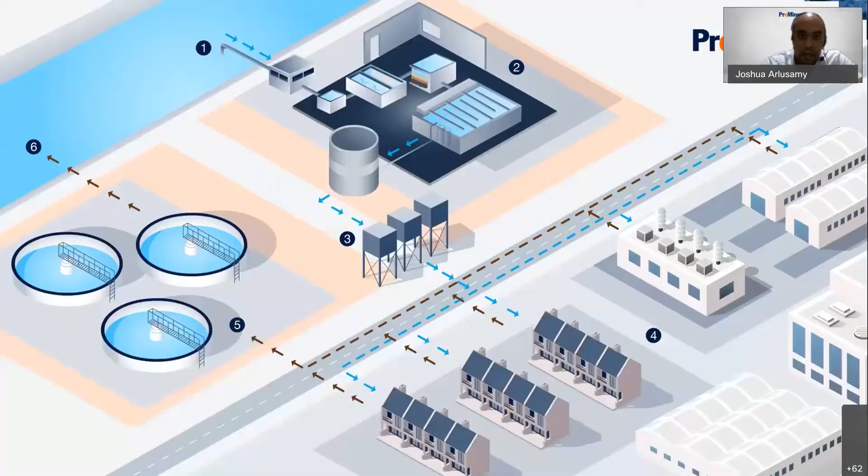While I understand among our attendees today there might be some with much more in-depth experience in wastewater treatment and process design, today we are picking up some examples and showing how technology can help to improve and also provide the possibilities and solutions required for you to use and adapt to your processes. So without further ado, let's start off with a simple overview of this water cycle.

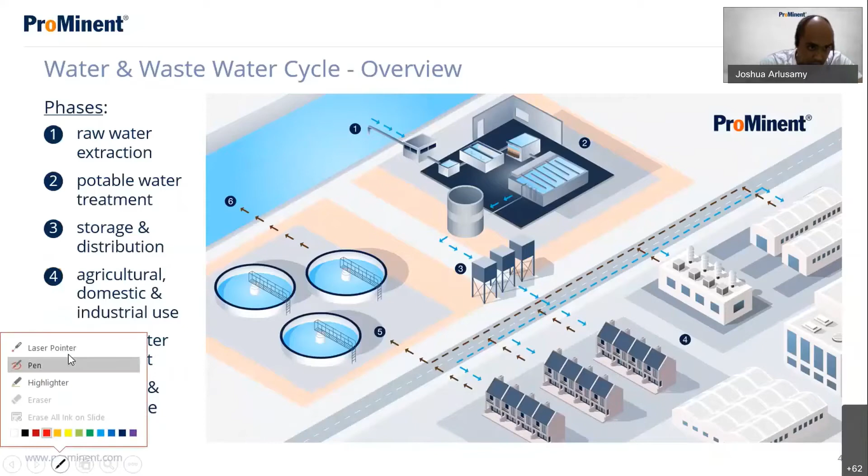Let me switch to where we have water intake by water treatment plants, which then treats the water and supplies it to households, agriculture, and also factories and industries. Now sewage from the households will be directed to our municipal sewage treatment plants, whereas factories and industries individually are required to treat their own wastewater and meet certain standards before they are discharged.

So this brings us to this next topic, wastewater treatment, called the silent emergency or crisis. Even Mr. C mentioned today, 80% of our wastewater from the homes and industries finds its way back to nature without being treated or even reused. Now, if I go back to this picture over here, yes, this is the ideal case.

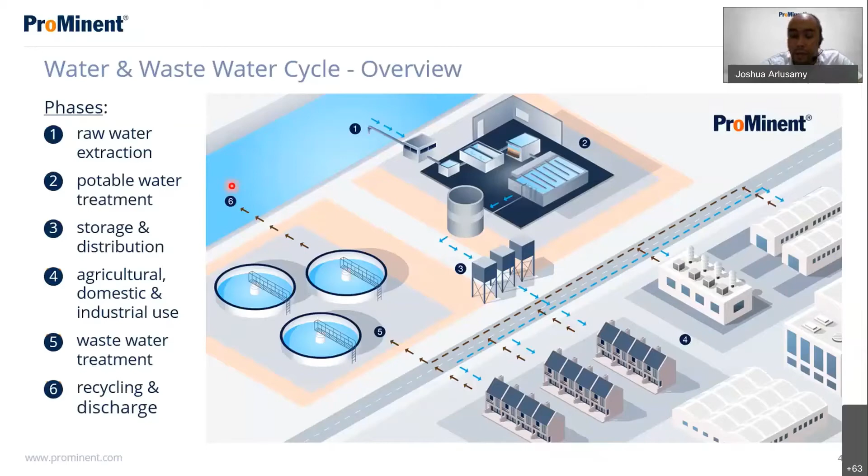This is what we want, but this is not what we see in most of our neighboring countries or even our own countries. For example, in Indonesia alone, we can see that more than 75% of the rivers monitored are highly polluted, and only half of them comply with good river quality standards.

In the Philippines, you have millions of cubic meters of untreated wastewater being dumped into the Manila Bay and Laguna Lake. I'm sure you have heard in Malaysia, we have recent water disruptions and plant shutdowns, which were then traced back to illegal discharge by factories.

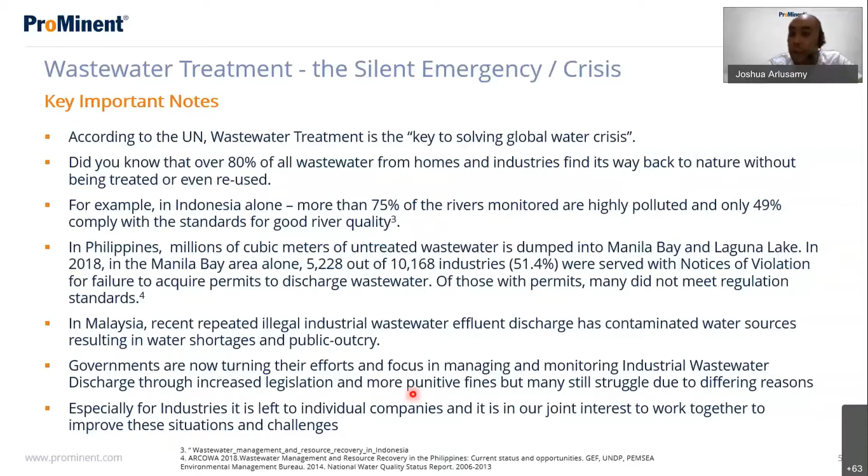So we see a lot of movement, a lot of government initiatives to increase legislation and more punitive fines, but it doesn't get anywhere because the struggle lies in the enforcement and how we are able to manage all these different industries that are scattered all over the country, some in very rural areas. So that's what we would like to address today.

Some regional insights of the countries involved. For Singapore, it is clearly stated what cannot be discharged. A pH of between 6 and 9 is fine; anything less or more cannot be discharged. Temperature cannot be hotter than 45 degrees Celsius, and caustic alkalinity cannot be more than 2000 ppm of calcium carbonate. There's a growing interest in real-time monitoring, not only to regulate, but also for us to react faster and improve efficiency and reduce wastage.

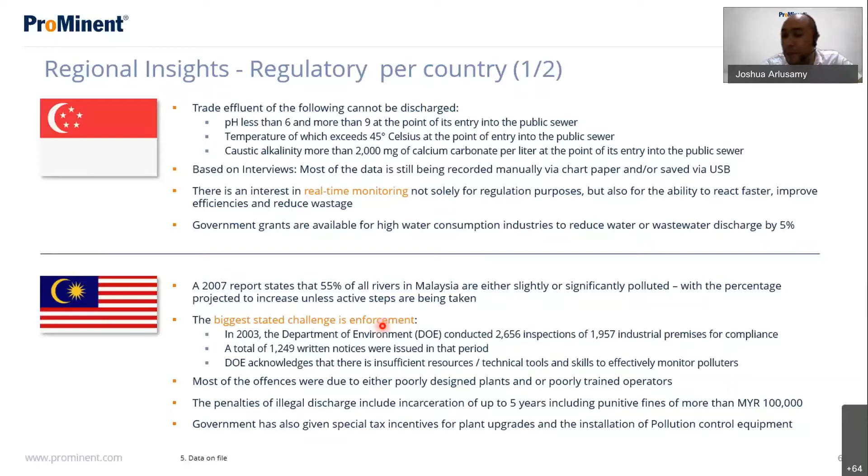In Malaysia, you will see it's a recurring theme here: the biggest challenge is enforcement. We don't necessarily have the resources and manpower to go to every single place, especially in Malaysia. Palm oil mills are a big industry for us, and palm oil mills are very much in rural areas. Even for me, at one point when I visited a treatment plant in Kelantan, you'd be surprised - upstream of the treatment plant was a palm oil mill, and I could smell the palm oil mill coming out from that factory. So those are the conditions we have nowadays.

Now, going more towards countries like the Philippines, monitoring is sort of left to individual companies for them to regulate. Places like Indonesia, again, enforcement is hard. Not only in Indonesia, we see it in Malaysia sometimes - there's discharge of illegal effluent, sometimes late at night or during rainy seasons, because you can't monitor it 24/7. You only have specific checkups once a month or once every 6 months or so.

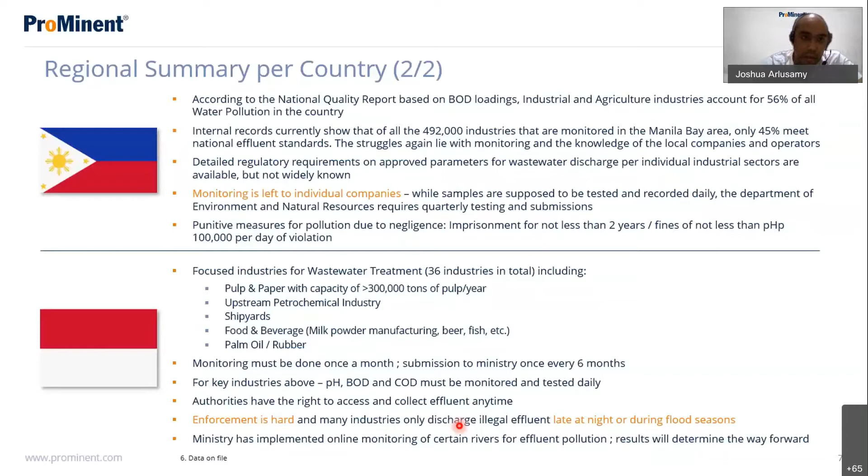This is a simple process flow of how a typical wastewater treatment looks like. There might be some changes, but what we're trying to highlight here is all these orange boxes, where ProMinent can come in as a solution partner.

We have our measurement and control devices. These are also analyzers for water parameters like pH, ORP, dissolved oxygen, chlorine, and together they communicate well with what we are actually very well known for, which is metering pumps or dosing pumps. These dosing pumps meter chemicals such as coagulant, flocculant, pH adjustment chemicals.

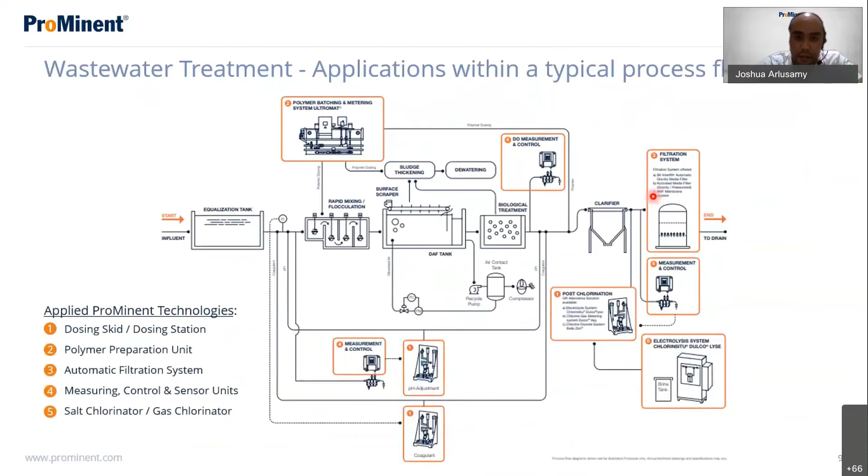So let's pick one part of the process, the dissolved oxygen monitoring in the aeration basin. We all know that aeration basin is being aerated usually by a blower, and most of the time DO is not really monitored. Most of the time the operation of the blower is manual and it's always on all the time. And energy costs for running a blower all the time is actually very high, and this is what contributes to a lot of cost consumption for factories.

Besides that, we also want to make sure that the sensors we pick are very suitable for the application we use. If you talk about wastewater, it's very dirty, high solid content. And if you put a sensor that is sensitive, we also have to make sure that the sensor is able to take this high load of solids.

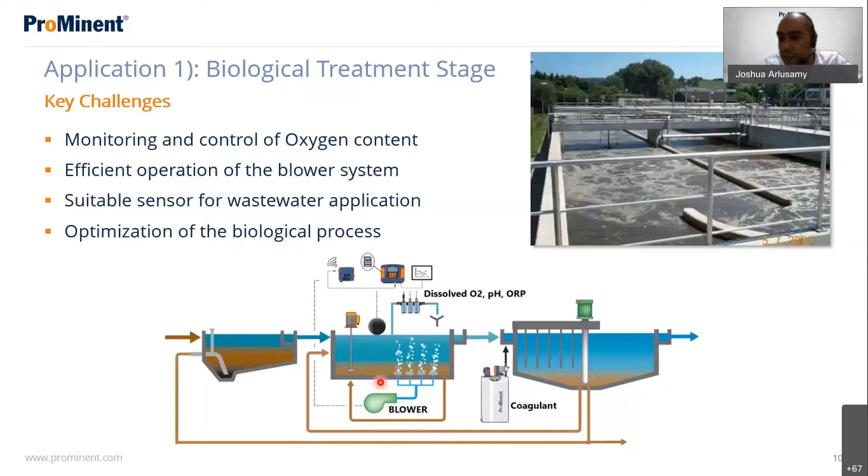And at the end of the day, it's not just the sensor alone. It's basically the controller taking the data, analyzing it, storing it in the cloud, and at the same time, controlling the blower. This whole process is what optimizes our biological process.

So for DO monitoring and control, why is it important? I mentioned about blower operation. Inefficient operation of blower system and compressed air network increases energy consumption, operational costs, and even risk of performance drop.

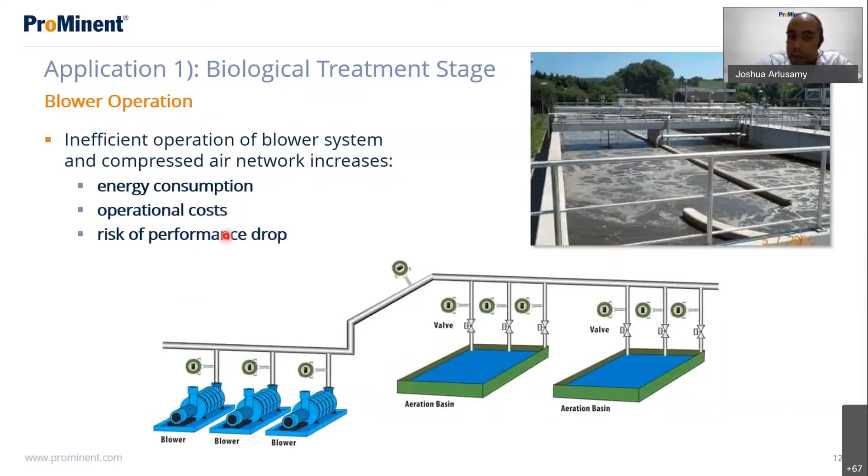More DO doesn't mean it's good. Under aeration aside, over aeration is also a serious issue for process quality. First of all, even 1 to 2 ppm above the required DO range can be wasteful. Aside, if you over aerate, you can break up the flocks that you form, creating pin flocs, which prevents them from settling, which then upsets the rest of your treatment process.

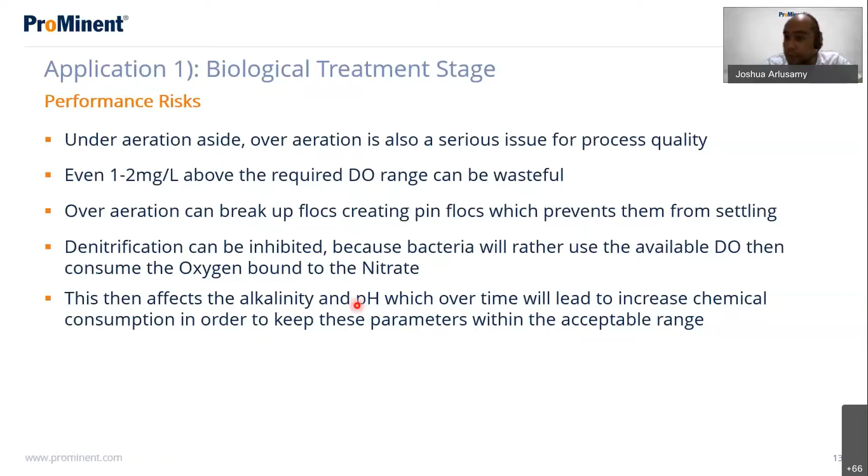Denitrification can be inhibited because when you have so much oxygen, the bacteria would rather use the provided oxygen than consume the oxygen bound to the nitrate. This will then affect the alkalinity and the pH, which over time will lead to chemical consumption in order to keep these parameters within acceptable range.

So what is our solution? DO monitoring is important because we want to monitor the parameter that we would like to control. We also want a DO sensor that is easily installed, either by submerging the DO sensor or in some cases in a bypass fitting. This controller then measures it, controls by PID, the blower for feeding atmospheric oxygen into the treatment stage.

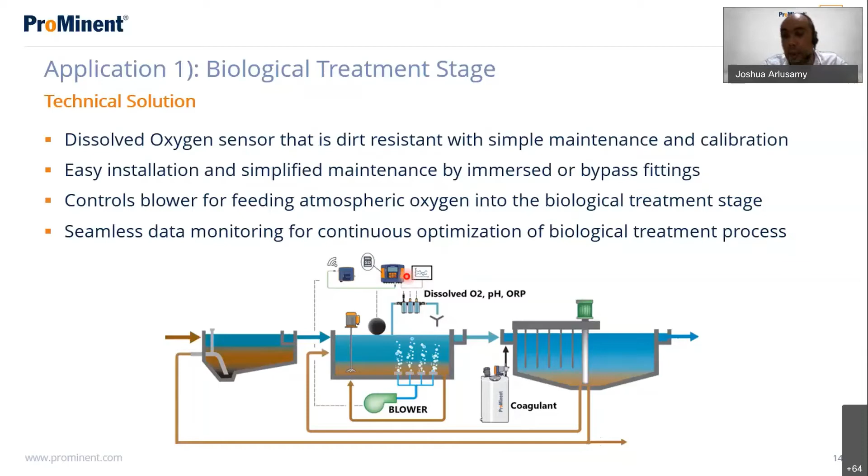And at the same time, we are continuously taking in data because DO and blower operation is not directly proportional. We need weeks of data and then we see, okay, we are still under, we're going to increase the blower slightly more. And then after collecting enough data, that's when we will know what our optimum operation parameters is.

So how do we control airflow to the basin? There are many ways to do that. This can be using variable speed drives for the blower. If you have multiple basins and a set of blowers, you can have control valves on each line to the basin to control the airflow.

Sometimes I've seen we measure airflow rather than DO, but this is not a direct correlation. So airflow alone cannot be used to control blowers. It doesn't have a direct relationship with DO. But DO itself is good because you can control the efficiency and you can set when you want to stop the blower once you've reached your set point.

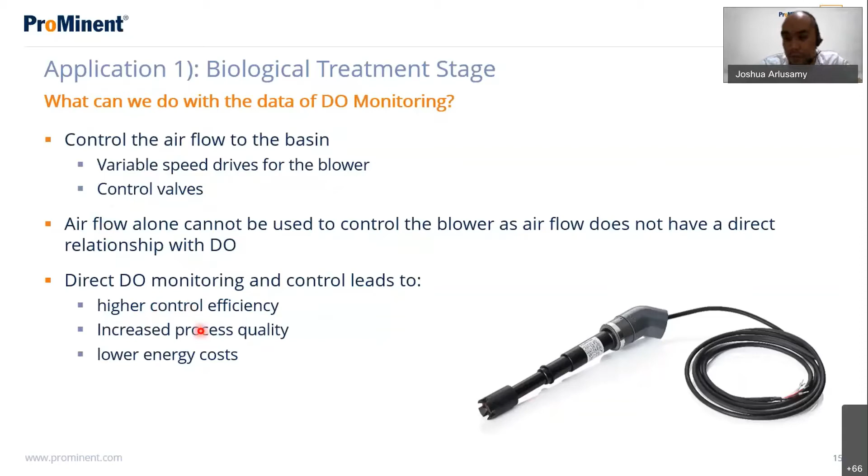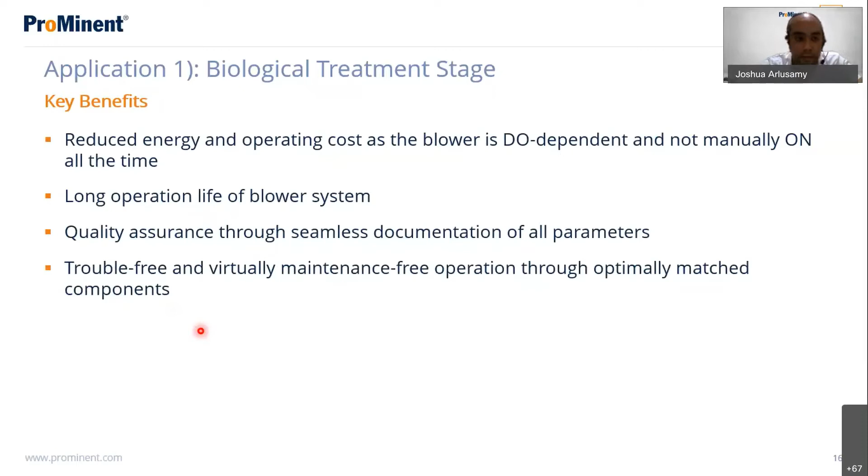Okay, so what are your key benefits? You have reduced energy because right now your blower is not always on. Once your DO is reached, it's throttling down. You have a long operation life of your blower system. You have quality assurance because you're continuously documenting your parameters, and you have virtually a trouble-free system through optimally matched components.

So implementing just a DO sensor alone is not going to solve the problem. It's always a plan, do, check, act approach. Data is what's important. When we install a DO sensor, we need to collect data for a week first to observe the trend before we adjust the control, as I mentioned before. Even power logging the blower will also help tell us how much cost savings we have on energy.

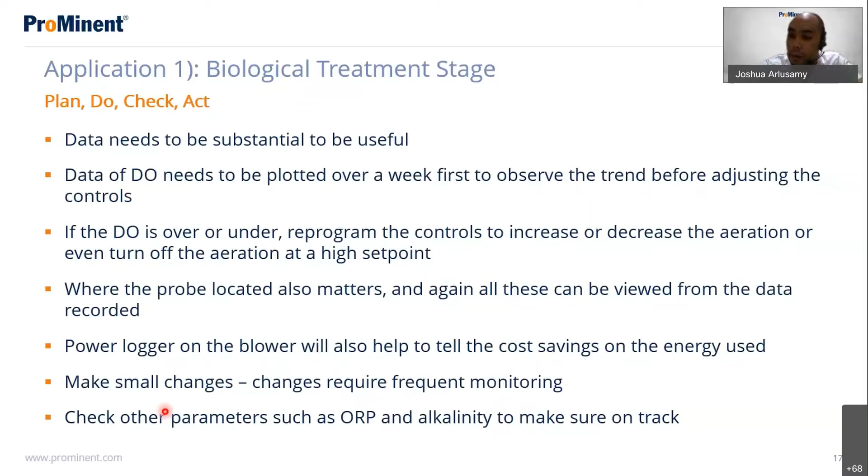We have to make small changes, and changes require frequent monitoring, and this is our topic today. At the same time, it's best we check other parameters such as ORP and alkalinity to make sure we are on track.

Now, bringing that same idea to the next part of our process: pH neutralization and chlorination. We know pH fluctuates very widely in industries. Wastewater from production and CIP can even fluctuate between 2 to 12, and we have seen before we have to maintain a pH of 6 to 9.

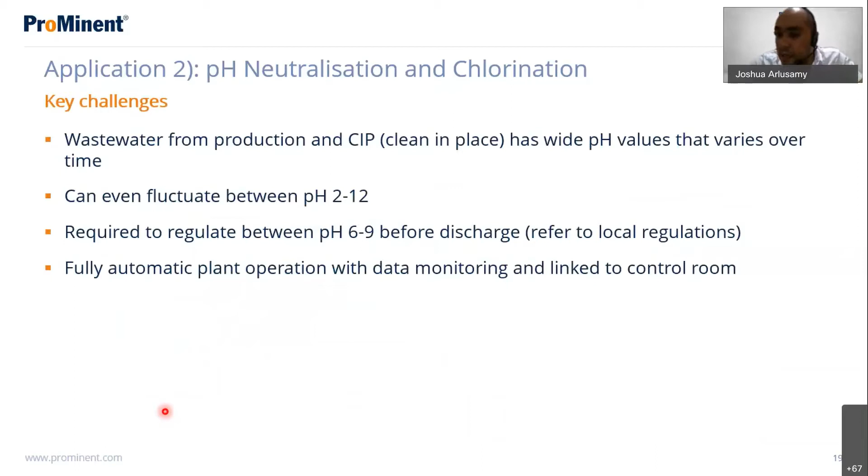This can be done with a pH sensor connected to a controller that is able to do bidirectional control. Bidirectional meaning you have an acid and a caustic pump. That way you can adjust the pH, increasing or decreasing. At the same time, you get the benefits of data monitoring.

So we are also monitoring the discharge of the water, and we are collecting data. This can be used by environmental agencies to come check or monitor their installations.

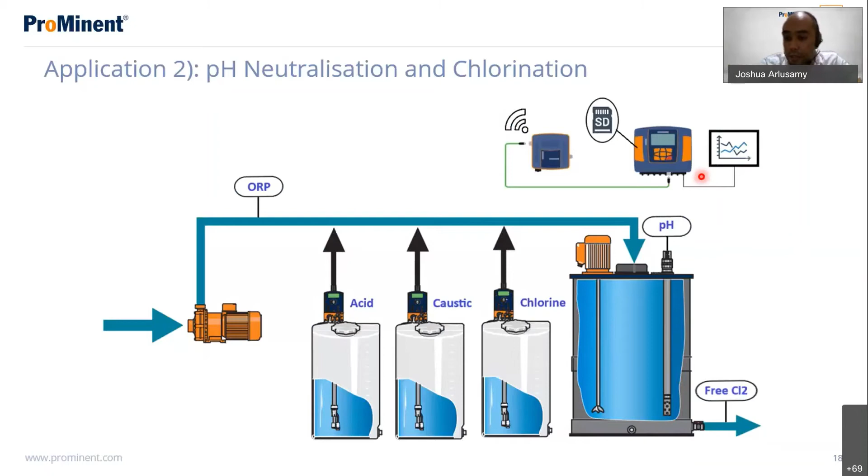Now, I talked about laboratory measurement. Why is it always the lab? And it's always an accredited lab because that's what you need to match towards. But these are sensors that are online. How reliable are these? As long as the sensors are calibrated and are up to date.

This is a typical pilot plant that we did. It actually tallies with the lab measurement. So even if you're very far away from an accredited lab, you are collecting useful data that can be used to monitor our water parameters.

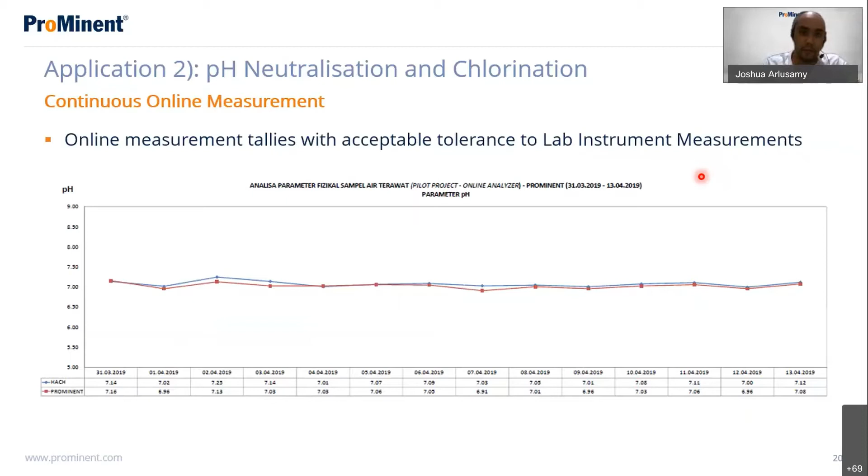This over here is pH. pH is very straightforward. Even for chlorine, which can be very pH dependent on the water parameter, it is also fairly stable and representative of a laboratory result.

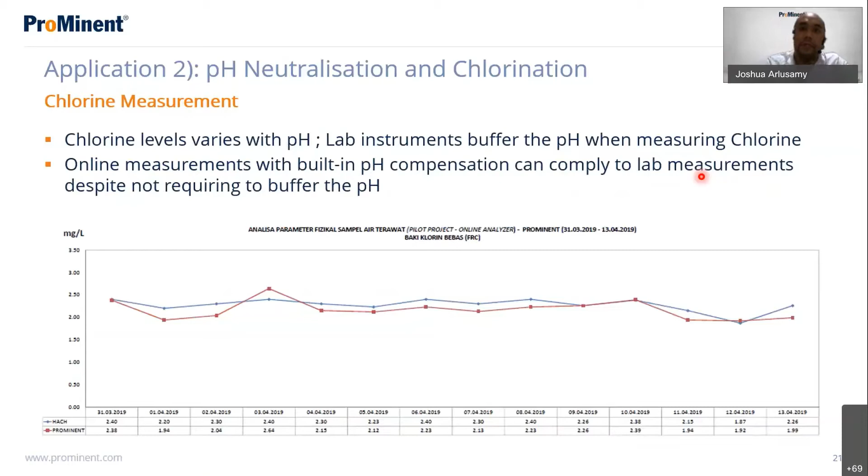So what are the technical solutions? A complete pH control station, a measurement station for final monitoring. It's all in one. So you're not only controlling, you're also monitoring it. At the same time, you're neutralizing the system using dual pump control. And all of this data is being transmitted and stored for your reports.

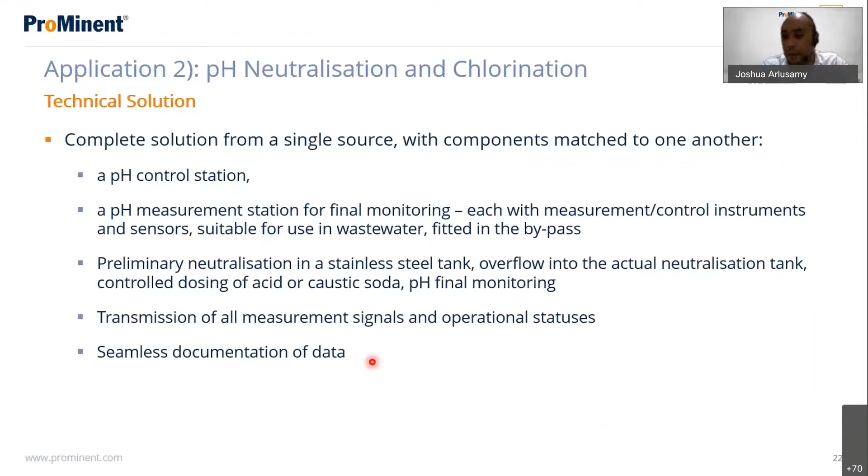So key benefits: we have compliance with statutory requirements, cost savings, and on water discharge, wastewater discharge levies. But I think primarily for us all, when we look at the bigger picture from the outside, now every plant can have its own monitoring process and control process.

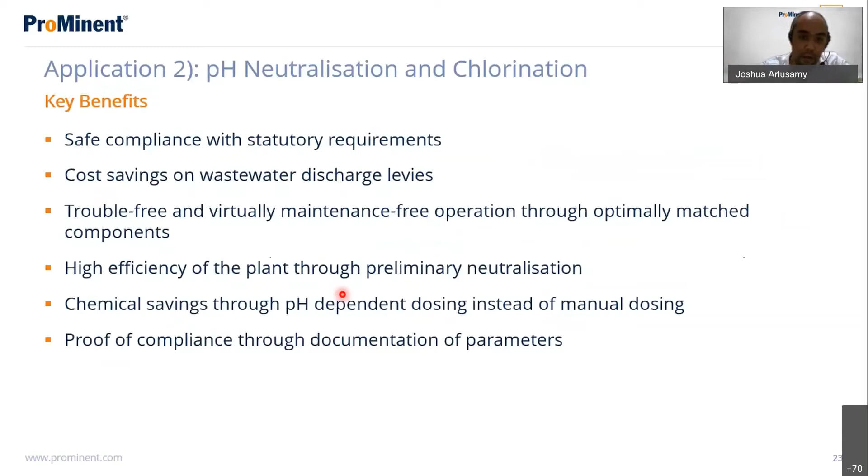So a bit more towards the gears and the pumps that work to make this all possible. A dosing pump is what meters the chemicals, and we need chemicals for our treatment process.

And we have dosing pumps, not just the pump alone, but as a skid. It's important to have a complete skid, because metering pumps work on the basis of accuracy, precision and safety. So you can't just put a pump and expect it to be accurate. We need dampeners, we need back pressure valves to ensure there's constant pressure to the pump, to ensure you're metering the right amount of chemical every time. So this is key. If not, what you're communicating from the controller to the pump will not be correct.

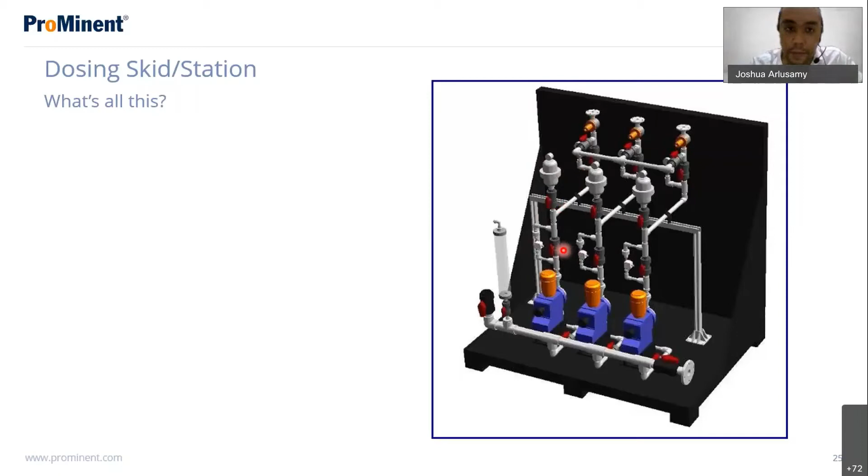And staying in line with our smart solution, nowadays pumps are also smart in the sense that they are able to detect hydraulic issues such as airlock, high back pressures, blockages, and diaphragm ruptures. So all these are data and operational data that can be collected and reported.

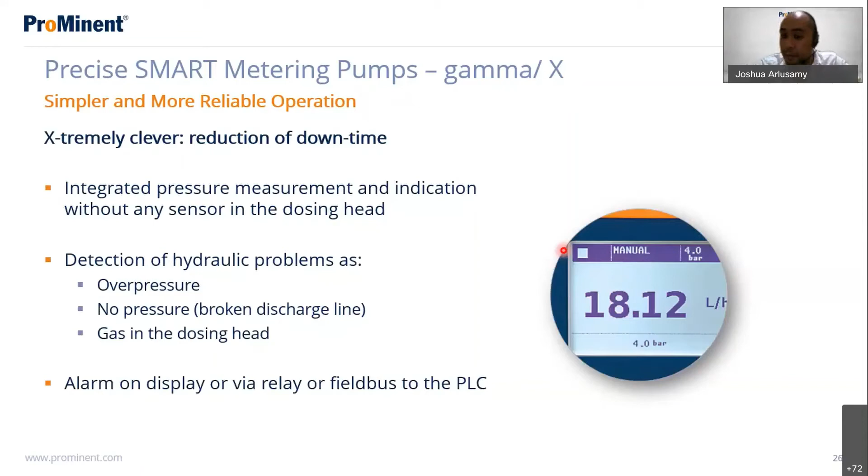So moving slightly away from the pumps, we have our water treatment system, and I would like to highlight the polymer preparation unit. Polymer is often overlooked, but it's very critical for the flocculation process and also the dewatering process.

Most of the time, sometimes I see polymer being prepared in an IBC tank with a normal high-speed stirrer and being manually prepared. This is not true, this is actually very expensive operationally, because polymer first of all needs time to mature and be activated, which is usually 45 minutes to 1 hour.

Secondly, polymer is a long chain molecule. You do not want to shear it with high-speed stirrers or high shearing stirrers. It needs to be properly prepared. Thirdly, it's messy. Polymer is messy. You do not want to be dispersing the powder everywhere, and preparing it properly is essential.

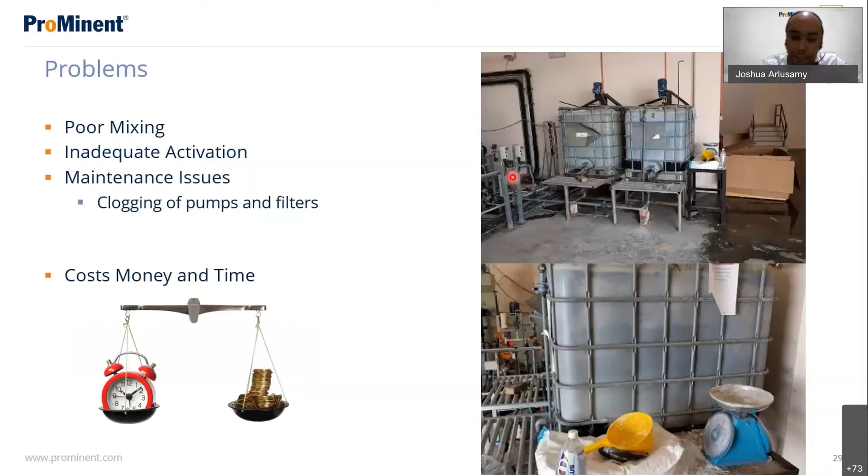So that's where polymer preparation comes into play. And by preparing a constant concentration efficiently all the time, this ensures that we're dosing the right amounts of polymer into our water and getting the benefits.

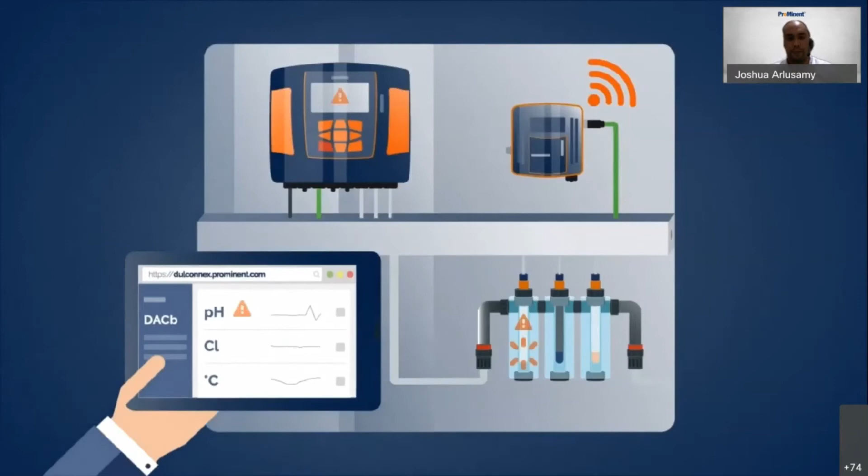Remember Pam's question earlier about data access and tracking? This is where we put most of our solutions together. Prominent is now focusing on making our products IoT ready to meet the stringent and important demands of our customers for data and better response times.

Our devices are now able to connect to our cloud, transmitting useful data for our customers at all times. From this platform, users can generate reports, access data from 6 months before, send emails, and even respond in real time when there is an alarm or abnormal situation.

This means that remote locations now become easy to access, and our experienced technicians are able to identify anomalies from the platform and narrow down failure points to advise operators. This eases troubleshooting and downtimes, which is so very critical when it comes to water, required 24/7, 365.

Despite so many fluctuating parameters, Prominent engineers have been able to precisely control metering pumps to adjust based on the different demands at different times by studying all the data recorded by placing our devices online. No overdosage, no underdosage, only optimum dosage at all times.

In this mini Prominent journey, we have just highlighted some examples of how, with the right reliable partner and solutions, it is possible to work together to avoid long water disruptions due to poor water quality, which could result in undrinkable water or even unsafe or illegal discharge of our wastewater.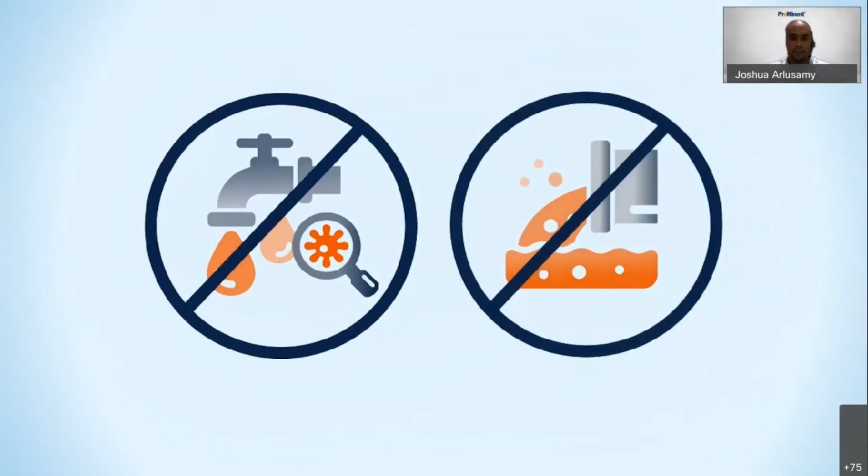This is done by measuring, analyzing and controlling our water at each stage of the water cycle. With this, we are able to safeguard our water and ensure that we can continue developing our economy and country, while also protecting our environment for our future generations. As a Prominent family, we hold true to our global tagline: ready for you, anytime, anywhere.

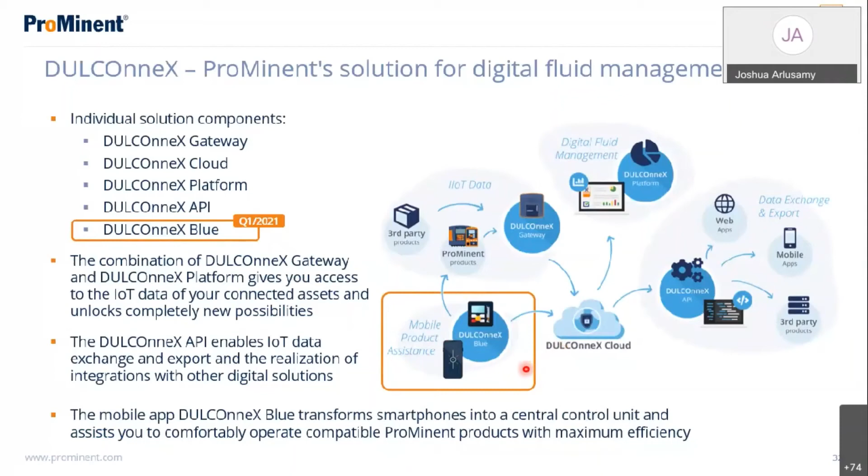And just a little sneak peek: beginning next year we will have a great relaunch of our mobile app too. That mobile app is also an important component because it will assist you in the interaction with our Prominent products. So that is about to come, to be released beginning of next year. I've had the prototype already in my hand, and I can say that app works.

Here's a little glimpse of what we are providing with the DULCOnneX platform. Basically, the platform is not intended to keep you using it as long as possible, but rather being in the back, having your back. So usually when it's configured right, you would receive notifications and emails just if need be, and everything else will be documented and automatically monitored in the back.

If you need to have a look, the platform is designed so that you will directly see everything at hand. You have a dashboard where you can put your most important values in a visualized way. You can have an overview over installations. You have all your devices which you have registered in the sidebar on the left side. There are many different things you could use, but the whole thing is designed to be basically an assistant in the back.

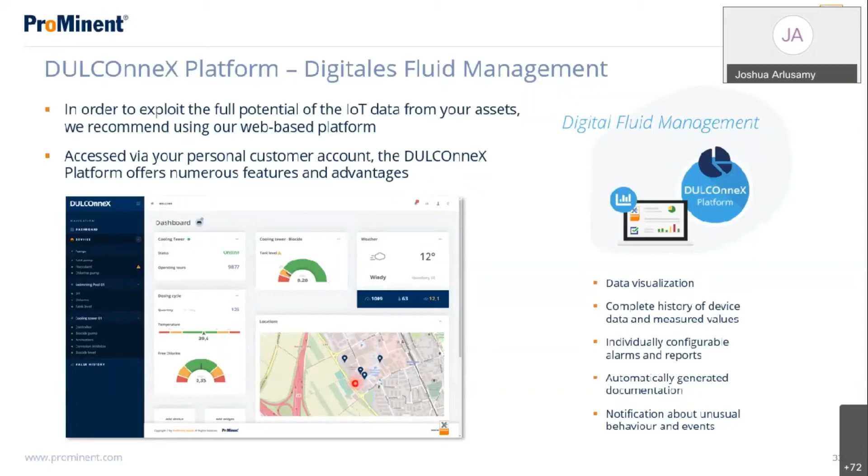Remote monitoring is a big thing, and that is basically the serial solution as of today. We are, of course, also having our fingers on remote control, but technically that is not a big thing to remote control a device. Legally, and in terms of implications for human health—we're talking about water here—that's another thing, so we're still solving some issues. We just got the legal paperwork finished to offer remote control with our platform, so that will be kind of released also throughout next year. But remote monitoring is a serious solution, and that's what the platform is basically up for today.

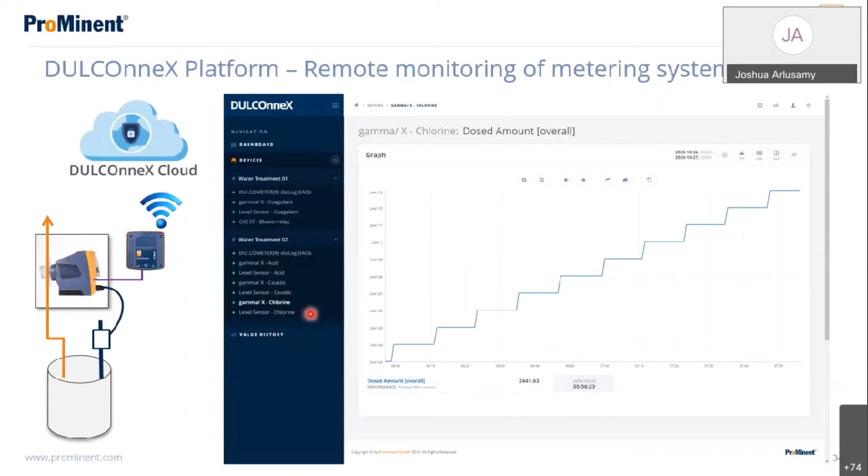The platform and the solution as a whole offer various benefits. As mentioned, you have all your installations in one place. You do not need to change web sessions or drive there. You have an overview in one place. So that's a big key benefit.

You can verify chemical dosage by monitoring tank levels via dosed amount and so on. You have a complete history of values, parameters, events: device went offline, device went online, had an error, had a warning flag, the history value over time of all water parameters. It has continuous logging also of what you do on the platform, so if somebody deletes an important alarm, that's also being logged and somebody will get notified. So you won't miss a thing.

These alarms are actually very helpful and powerful. You can set completely freely the ranges that should not be over or undershoot. You can configure several recipients of email notifications, so second level, first level emergency, or teams if you want.

You have automatically generated reports that can also be individualized on demand, but basically that is your documentation automatically provided to you. And you can subscribe on the platform as a user for the devices, the application, or all devices that are relevant for you.

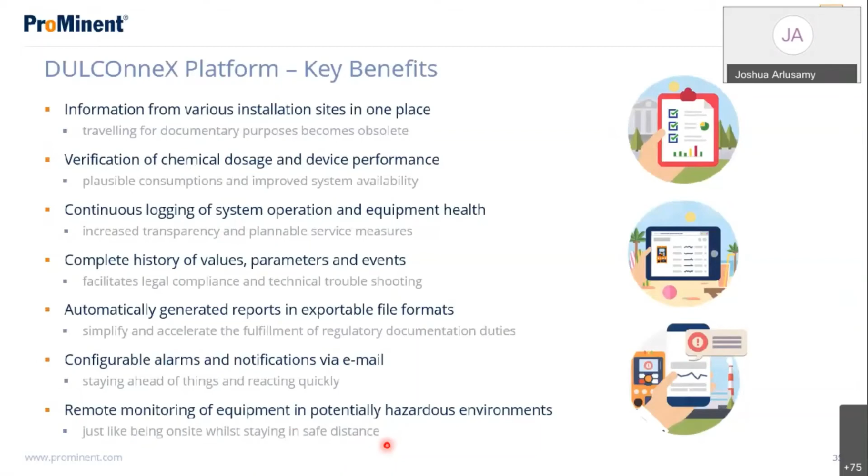And the platform, last but not least—maybe you can jump back here, Josh, just one second—it enables you to remote monitor potentially hazardous installations. We have heard about chemicals today, and there is stuff you don't want to get in touch with, or if you need to go there, you need to dress up very precisely with all that security gear. So just having a quick glimpse can save you a lot of hassle, a lot of time, and prevent you from any potential health issues.

As mentioned, that's meant for integration, because we know we're just one player in the ecosystem. There are so many operators of sewage purification plants, distribution networks, and many different players. Some might already have their digital solutions or platforms in place, some will have local PLCs, and what's utterly important is that all data can be accessible and integratable.

So we're not trying to create a closed ecosystem like Apple, where you can't do anything with your Android phone if you have an Apple environment at home. No, we want to really improve things, improve efficiency and overall water treatment quality and process quality. So we are really looking for partners here, not just customers.